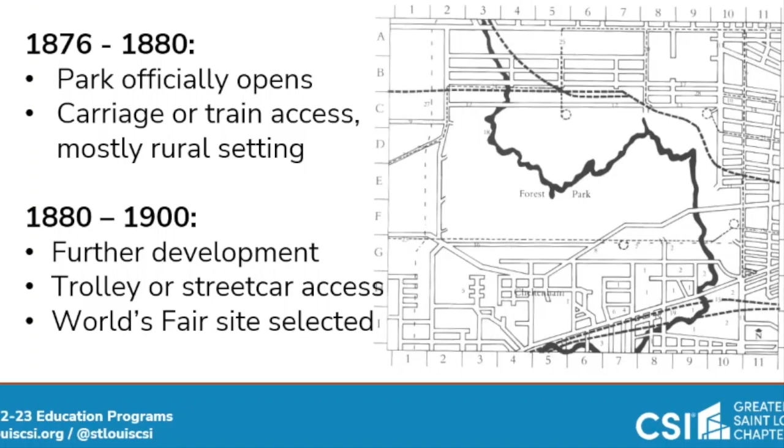More hard surface. It periodically flooded. So as we further developed the park, as we got trolley and streetcar access, as we moved west, it became a more intensely used park.

And then just before 1900, the World's Fair site—we're going to have the World's Fair in 1904—the site was chosen to be in Forest Park.

So, a couple of influences that were going on when you're designing parks back in that era. Frederick Law Olmsted, who designed Central Park, sort of the father of American landscape architecture—this is his sort of image. It's an urban park, but it has a very rural feel to it. It's picturesque, allowing for pathways like this, and also some more open grassland, and so forth.

In the early 1890s, the City Beautiful movement starts to take place. Daniel Burnham, the architect of the Columbian Exposition in Chicago in 1893, is the guiding light to that. The idea is a Beaux-Arts or neoclassical feel to it—much more formal than what you see in the above photograph.

So here's what if we were talking about what we're doing with the park in 1900, here's what we would face: which of those two ideals are we going to choose?

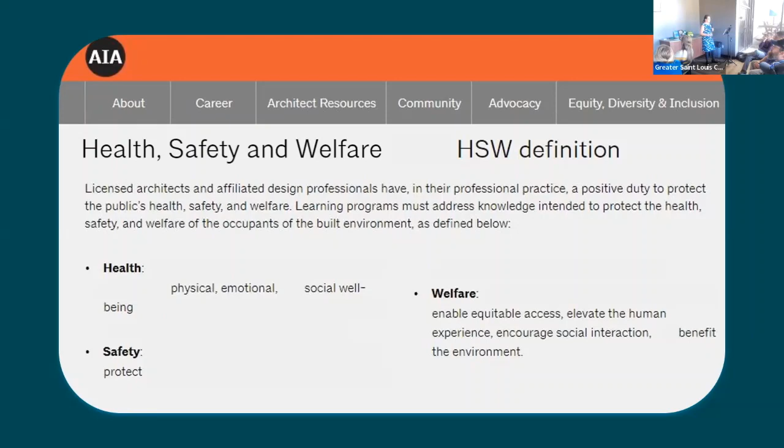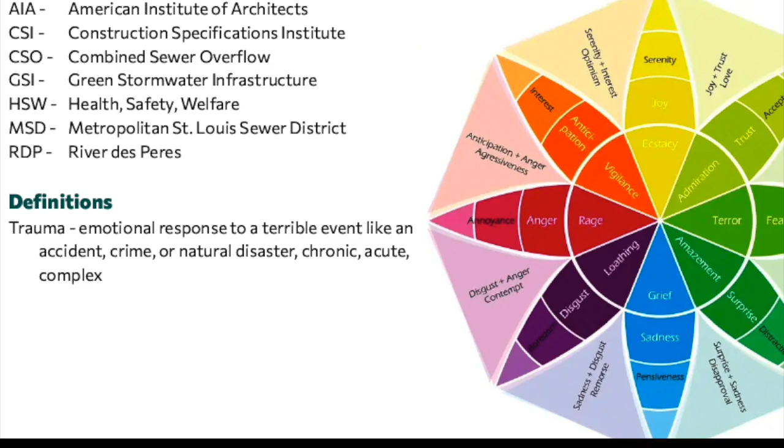I put on our little cheat sheet a definition thing, and the definitions I was trying to put were for things we wouldn't typically have good definitions for. Under the definitions, the only one I got to was trauma, and I think that's really important because...

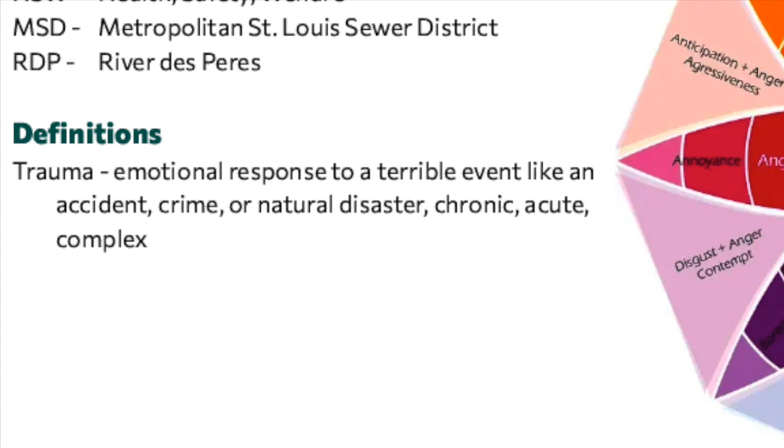We as a people have experienced a collective trauma, and that's the pandemic. I listed chronic, acute, and complex, and you can imagine trauma comes in a lot of various forms, from a car accident where you hurt your neck and you're afraid to go through that one intersection again, to the loss of a job, to a medical issue, to an abusive relationship, to the pandemic.

I think what's really important about listing that as a real thing is that it's something we've all experienced. We all have an exposure to that. In fact, I remember when I got COVID, after the fact, I wished I had put an out of office that said I got COVID. Everyone was super gracious on the tail end, but it would have been even easier on the front end if I'd just said, yay, I finally got the thing that we've all been experiencing.

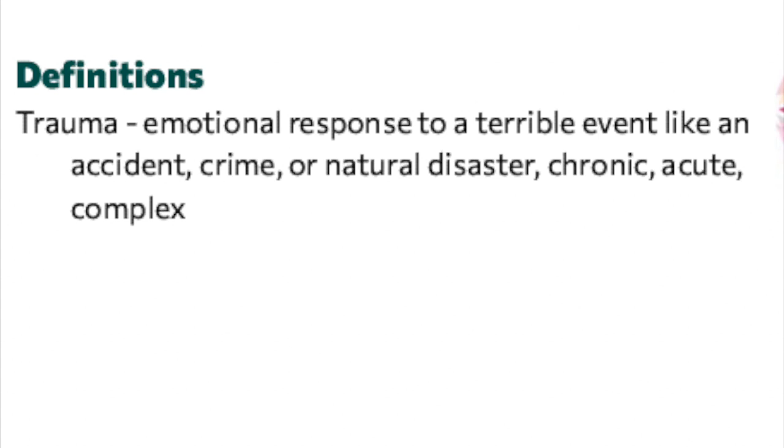I want you to pull up this piece of paper for a second. On the front there's this pretty wheel, a wheel of feelings. You can look at that and learn some words. There's discussion questions, and on the back is the fun part, a list of things about me, where when your mind wanders in the next 45 minutes, you can fill this out.

And I'm inviting you to make up stories about me. Think about how I got here today, whether I live in a house or apartment, what my hopes and dreams are, how many jobs I've had. You're just gonna make it all up. And if you know me personally, you can fill in whatever you'd like. Oh, I already started that — that's me. Let's get back to it.

There are other categories on there based on discrimination, and what I want you to think about is that you're going to make up all these stories about me, and some of them will be true and some won't. So as you look at this sheet, make up stories about me, but don't tell me — I don't want to know. As you work through this, think about which ones are factual and which are not, and just take note of that. That's all.

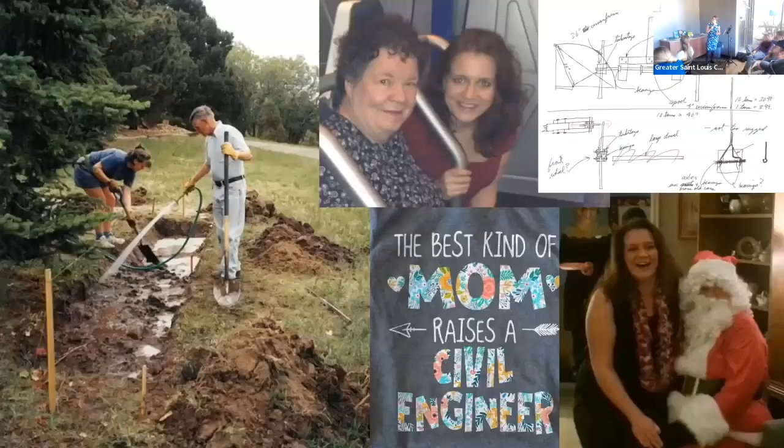This is another little bit more about me that I think is sweet because I know my parents are watching, and I'm just going to quickly go through these. On the left is my dad and I building a leach field in Colorado Springs. I found this picture probably four years ago, and I'm guessing I was 13 or so at the time. I just think it's so brilliant that 13-year-old me wanted to be an astronaut. I definitely didn't think I'd be a civil engineer. So how fun that at 13 years old, I was creating the wastewater field in our own house.

And then the pictures of my mom I think are really special, because my mom taught me to make everything a fun game, and that if you're bored, that's your own fault. The bottom right is where my mom dressed up as Santa Claus at my college graduation party when I was 28 years old, and it was a long time coming. So she added a whole lot of pizzazz. I was just a December graduate, and she had lots of people at my party sit on her Santa's lap.

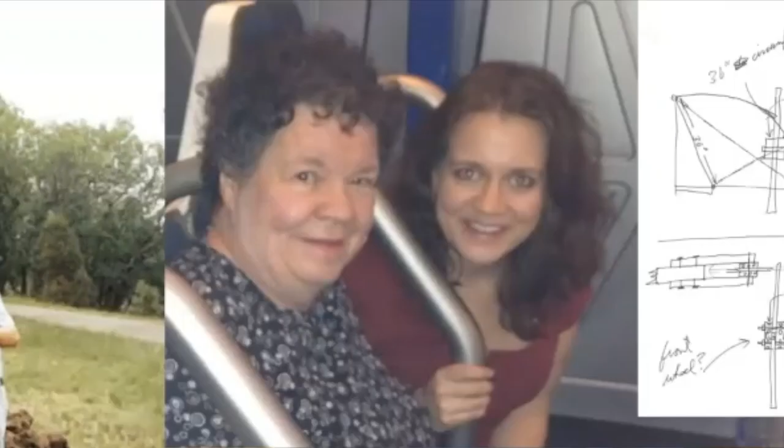And in the middle one at the top is my mom and I riding a ride at the Kennedy Space Center that I suspect was pretty scary, because she's got a little apprehension on her face. However, she's willing to try new things and knows that I'm willing to try new things. I think she trusts me to help her try the fun new things together.

So the note I left was that my mom taught me that hair grows back. That's so funny for those of you that worked at MSD, where I shaved my head a month after I started.

My mom is an amazing project manager and chef, and I think she could have been a civil engineer. My dad is an electrical engineer, and he taught me that every problem has a solution, and that I can do anything. Every problem does have a solution with enough resources, enough time, enough money, enough everything. Our only limitations to our problem solving are those resources. That's a sweet mousetrap car my dad clearly designed, but I do remember building most of it.

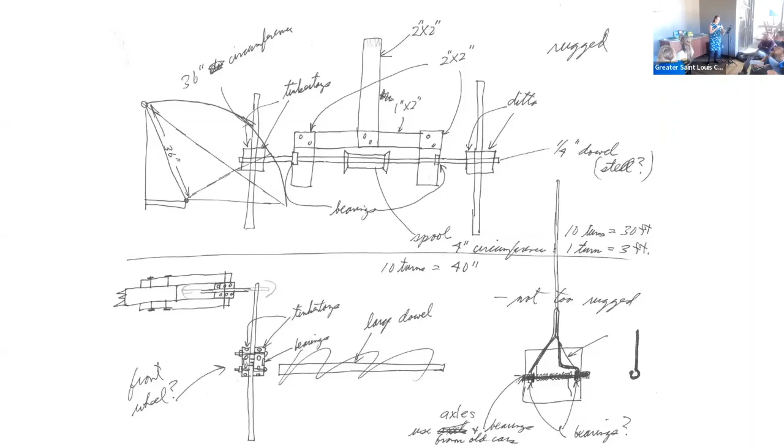People have a harder time relating to someone who doesn't look like them. And I reframed that positively to: people have an easier time relating to someone who does look like them.

I intend to make a whole lot of analogies today between the River des Peres and our human bodies, between how we design things and work in community, how we can treat people in our places of employment, but also our families better. So when you're wondering how does this relate to me, or my communities, or how are we the same?

There's something I've been reading a lot lately called an empathy gap, which is that we have an extra hard time putting ourselves in someone else's shoes when we're having a hard time ourselves. This keeps coming up lately as work's picking up, because the number of people bombarding me with minor minutia, not recognizing that I'm right at the end of my rope, really overwhelmed, is pretty startling. But people know me as a happy-go-lucky person who has time for everybody. As I'm trying to tighten those reins, I'm really recognizing that you're used to me dropping everything to help you, and now that's changing. It's been an adjustment in a lot of my relationships.

So as we're framing things positively, I also want to note that some of the ways I'm trying to get better at being kind to myself is reframing my own stuff positively: instead of saying I'm lazy, I'm efficient. I'm not a procrastinator, I thrive well under pressure. I didn't bike here at the last minute, I got here right on time. I'm not sensitive, I'm observant.

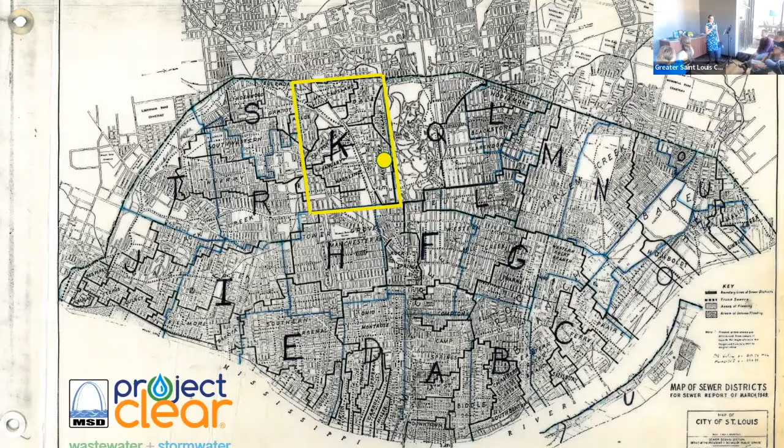Okay, so again, yellow dots roughly where we are. What do you all see that's special about this map? What do the blue lines indicate? Is that Deer Creek that goes into the River des Peres? Why is there a dead spot around Forest Park and all those blue lines?

Doesn't the River des Peres open up somewhere to the north of the park? Or is that one line that I'm looking at? Well, where the three lines to the north are ending, that's where it turns to piped, and then just to our south is when it opens back up, where it daylights.

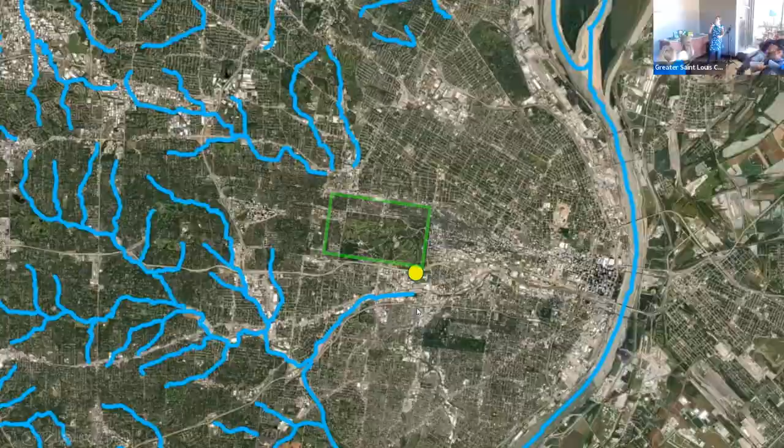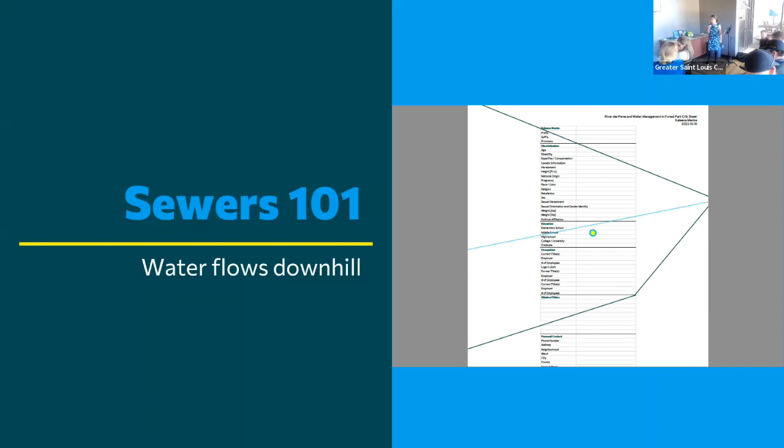So the other note is that if you fold the solid lines like a mountain fold and the blue line like a valley on your origami, you'll get another hint of where that is. Yeah, that's good.

Pointing to the reclamation facility? Nope, bigger scale. Good. Oh, folks at home, I forgot to tell you where this presentation is, or the cheat sheet. If you go to my website, which is my last name, Menke.llc, there's a PDF right at the top that you can find and look at this for yourself.

Do you see it now? So this, ideally I wanted a whole outline of the United States on the back there, but it wasn't there. So the blue line down the middle of that backside roughly represents the Mississippi River, and the two black lines on either side roughly represent the mountain ranges of the Rockies and Appalachian Mountains. So that is to help us learn what a watershed is.

Something else my mom is super good at is event planning or party planning. And what I think is fun to relate to this is that, as part of being a stormwater engineer, what you have to do is imagine you're a water drop and you fall from the sky, and where does that little water drop, what little journey does it go on, and where does it go before it ends up at the Lee wastewater treatment plant, or the Mississippi River, or Louisiana and the Gulf Coast, or either ocean? How does that water drop get there?

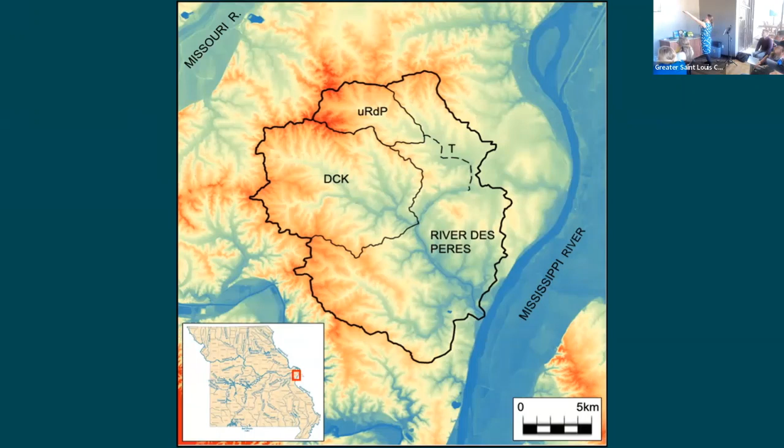Okay, so here we're zooming in a little bit more to show the same watersheds, where we've got the River des Peres watershed, and then DCK, Deer Creek. URDP, that's Upper River des Peres. I didn't put the little dot on this one, but we are roughly where the little dotted line and the black line are next to each other.

Okay, tell me what the flow rate is for a pipe. What's the equation? Yeah, area times velocity. Q, which is flow, equals velocity times area.

So in these two instances, we have a pipe on our left, where the area is represented by the yellow, and then the area is yellow on both sides. So one is an enclosed channel and one is intended to be an open channel. I shouldn't put the blue line on top, but can't get everything right. The other thing I want to show here is that if that area is similar, if the yellow is roughly similar in these two, then the flow is based on other materials like the slickness of the pipe or the material of that channel that we have.

So in the River des Peres, we hit all the options. We hit pipes, we hit open channels. There's parts that are kind of naturalized upstream of the River des Peres, what we know and love as the River des Peres.

And how that relates to how we design infrastructure in the future is that the biggest take home is the one on the left, the circle. When you're out of space, there's no more space for the yellow to go.

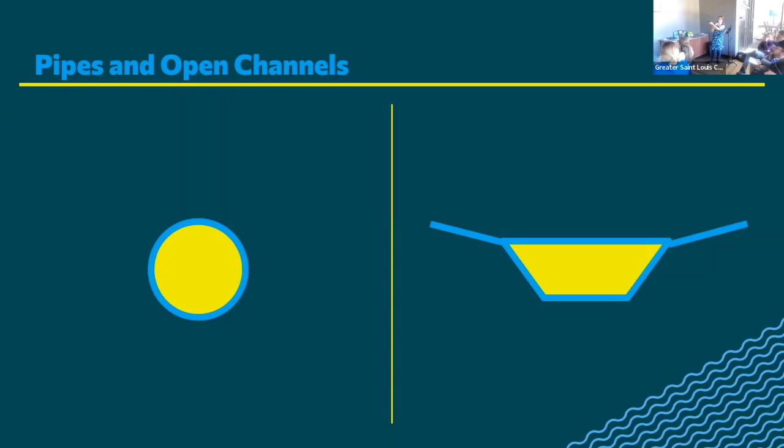It comes out through our streets and through our sewers, and it floods our basements, and that's all we got. Versus on the right, when the yellow exceeds that bowl, then it overtops it and comes out on the side banks. And we just got to go back to the pea funnel for one minute.

So the previous versions of pea funnels, up until about two years ago, all seal against you, so you have to hold your pea so you don't let it out too fast. Whereas this one, you can let it out as fast as you want, and it just overtops the side of the channel. It's pretty neat.

Okay, then we're going to do a quick one on sewer overflows, aka why St. Louis smells so bad in the summer. So this is, I imagine, pretty well established for most of you in this room, so I'm again going to go over it quickly.

When rainwater falls from the sky, we collect that in one pipe system, and our bathrooms and our laundry and our showers go in another pipe system. At first we used to throw those all in together, as George mentioned, and then we just throw it in the Mississippi River. So our method for managing wastewater used to be: get it away, and get it away fast.

We're starting to recognize that that has a lot of problems with it. So this shows a combined sewer system where the rainwater and the wastewater, the shit water, are both going in the same pipes. When that happens, for the most part our systems can handle that, lots of the time. When it can't handle it, it can't handle it in a really big way, and that's getting worse with every passing year.

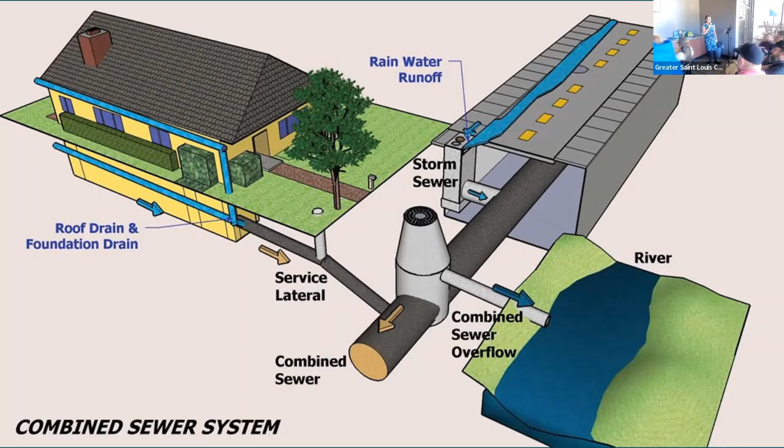So this is kind of an angled view, and I've got a couple more that are just a plan view and then a section view. Clearly this was created by someone else, and I don't know what those words mean, but my best guess is that the orange or red is your wastewater and the blue is the stormwater.

So previously, on the left, you can see the solution was to put them all in one pipe, one big pipe. Now we're realizing, oh gosh, we should probably separate those two, because when it rains a lot... This also shows well the relative size of stormwater pipes versus shitwater pipes, which is that stormwater pipes need to be a lot bigger, because when it rains, a lot more comes through than it takes to flush the toilet.

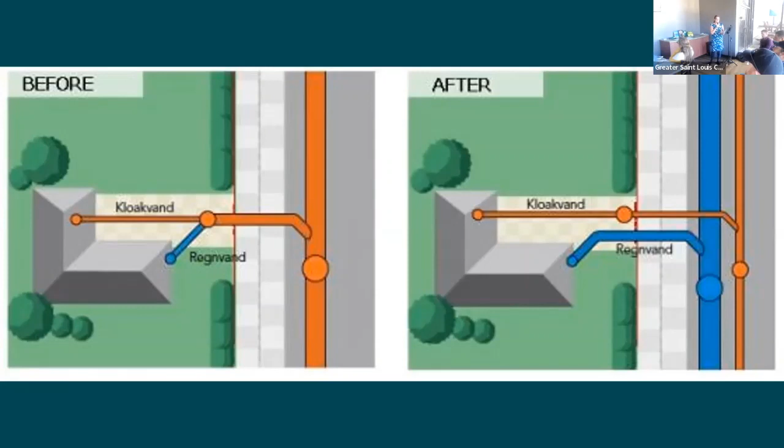Okay, and then here's where we're going to show those interceptors, or those dams. So on the left is the combined sewer, which again means our stormwater and our wastewater goes through the same pipe, versus separate sewers, where they go into two separate pipes.

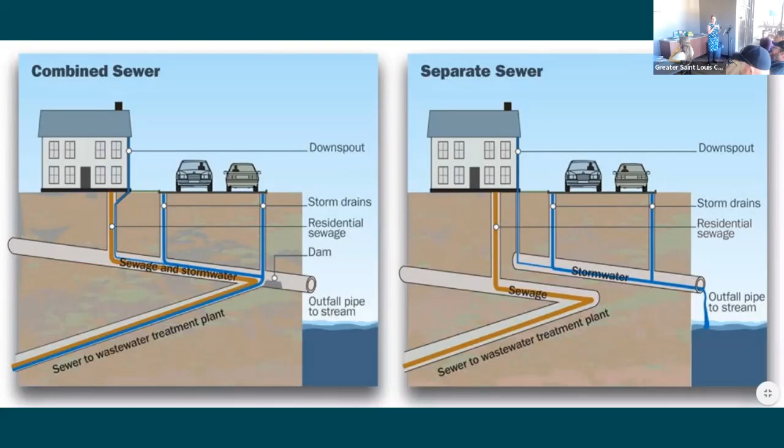And in the city of St. Louis, that's all we've got — we've got combined sewers throughout. So when I flush the toilet, and when it rains, all of that water goes to the same place where I live. On the left, they show a dam here, and that's another name for an interceptor. So a dam, or a diversion wall, or a gate, is just a way to say: okay, shitty water, we want you for the most part to go this way, unless it rains a lot, and then we're all screwed. And then it goes straight to the Mississippi, and that's all right too, because it's the best we got.

I started talking about this a little bit while I was at MSD, and it's really important to me because of the pieces of our history that I don't think we fully recognize — the impact on everything, and how that relates to how we treat people that look different from us really matters.

So MSD is an organization that existed, or consolidated a bunch of sewer districts, in 1954, and basically got the privilege of gaining a whole lot of collective problems that nobody alive firsthand contributed towards creating — or lots of people alive. You're either aware that it's an issue... for instance, I'm not even from here, I didn't do a lick to create these issues.

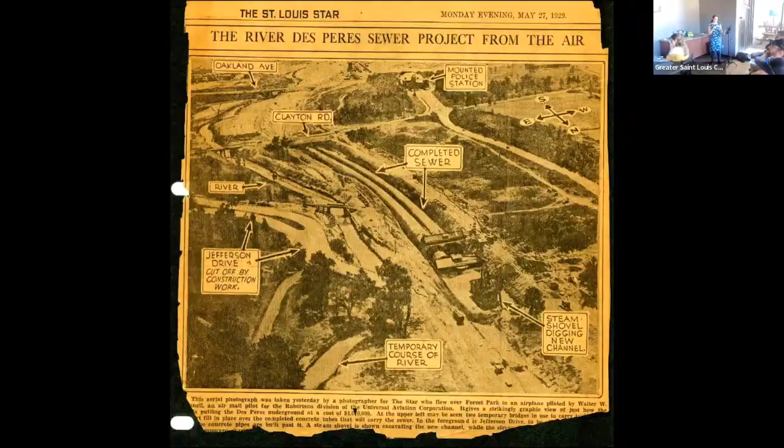It's a crane. Here is the map of the total spot through Forest Park. In the middle, you can see they show the typical section for the different parts of the channel. Through Forest Park, it's completely buried. If you can picture that river picture where we had the blue lines that then stopped for a bit - once we exit Forest Park, about a mile diagonally that way is where the channel opens back up, and you can see this V-shaped trapezoid where the pipes open up to an open channel. You can also see there's a little tiny blip of a loop underneath.

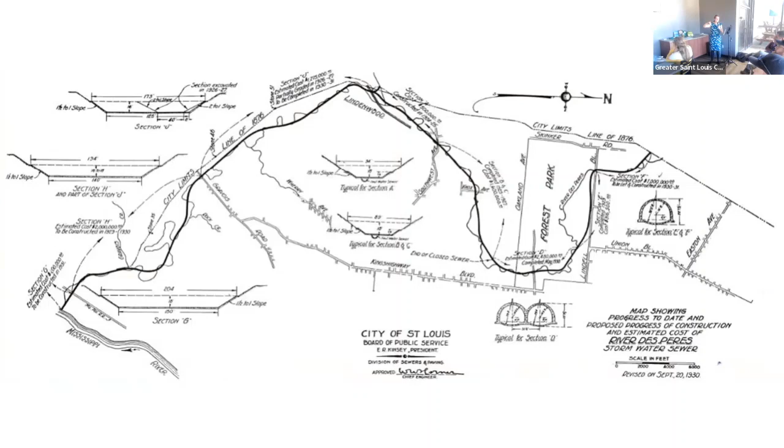So the construction of the River Des Peres, the twin tubes and the open channel, took place from 1924 to 1933.

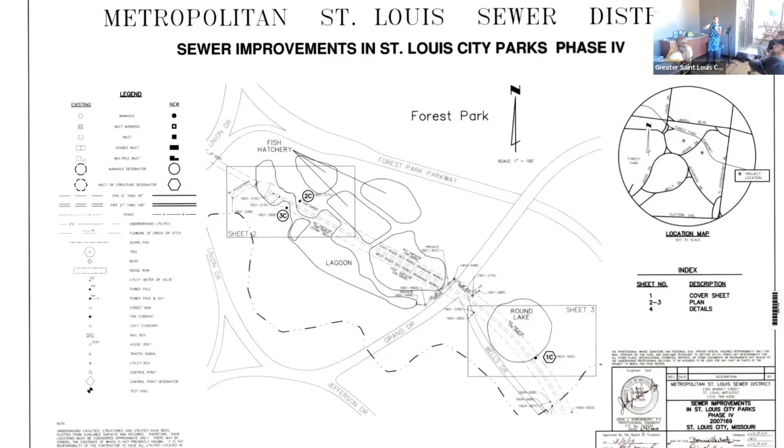Now we're hitting the imaginary, or 'imagine our future' portion of this. Forest Park is close to home for me. I just live a mile and a half that way. I spend a lot of time recreating in the park. I think it really is the natural gem of our city.

What's really exciting is now that we're starting to realize that our systems all work better when we work better together. This was one of the favorite projects I worked on while I was at MSD, because we took these freshwater sources and combined these lakes into an interconnected system, and it's currently under construction right now.

So this is a spreadsheet that Gary, formerly of MSD, made, which shows the rainfall totals from 1870 to 2018. I throw this in there because it's very data-based and not pretty, and it covers over 100 years. But what it does show is a very clear trend line for our rainfall events, which is climate change.

Our rain in this area is getting more intense and more frequent. You can all remember your water classes in third grade, the water cycle, which is that we have a constant amount of water in the globe, and yet it's hitting some areas more impactfully than others, and also hitting them more frequently than others. So that's the volume and then how often. You can see the spikes have gotten bigger here in the last 20 years, and this only stops in 2018 - we're blowing this chart out of the water even today. The pink line is just highlighting the trend line of the moving average. I highlighted one of these down here just to show it is going up.

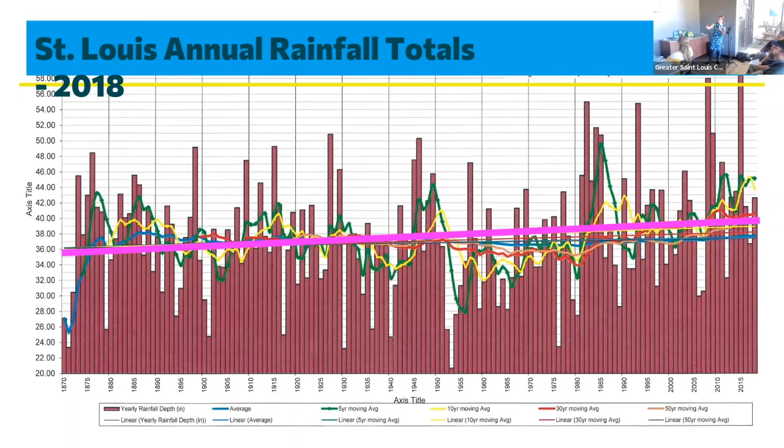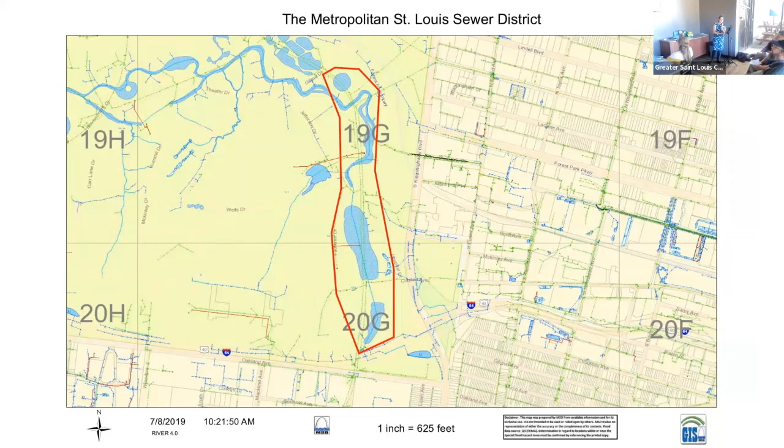This is a quick funny to show why you should always steal other people's work that have done it better. This is an exhibit I made at MSD to present to my board on why I thought this project is located here. And then I reached out to SWT Design, who made that so much prettier exhibit.

SWT Design is the design lead on this project, and they work with Forest Park Forever, an organization whose goal is to make Forest Park our crown jewel today, tomorrow, and in the future. They have such a great community aspect to everything they do. They recognize that this stuff matters, and that if we're spending hundreds of millions of dollars on this to do it again, we need to be doing the best we possibly can given the information we have right now.

So the other thing worth noting about this Forest Park Waterways project is this is just the eastern portion. Before I showed you that we had done a little bit over there, the part on the west is already done, and it's a much more interconnected system. And now we're getting the tail end of how to do this.

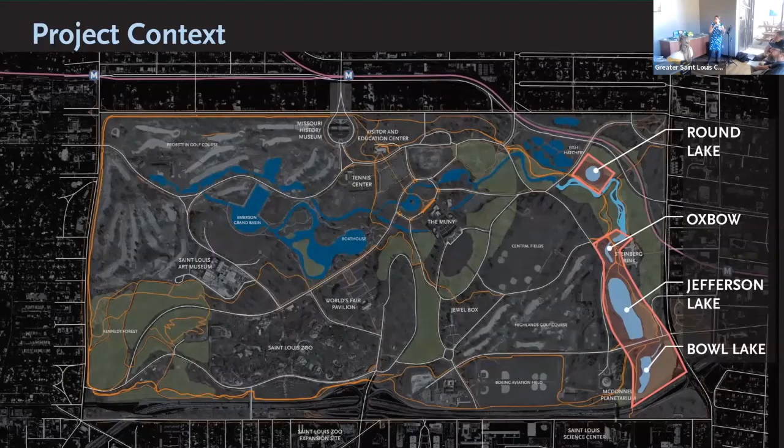So today, all of these lakes were separate lakes with a water source from the City of St. Louis Water Division coming out on one end, and then on the other end there'd be an outlet structure that overflows straight to our sewers. So we're unnecessarily treating millions of gallons of clean water every day just because of how these lakes are set up. This is just a list of why this project's awesome.

But the really big takeaway I think is important: as engineers and designers, we get stuck on the technical aspects and why this matters, and we miss the larger picture, which is that we need wildlife in our cities so our cities can thrive. We need clean air in our cities so we can thrive. And it's all for us. The water will go where the water is going to go with or without our involvement. But if we don't want it to flood our houses and we don't want it to get us sick, then we have to help guide it, and we have to do that thoughtfully.

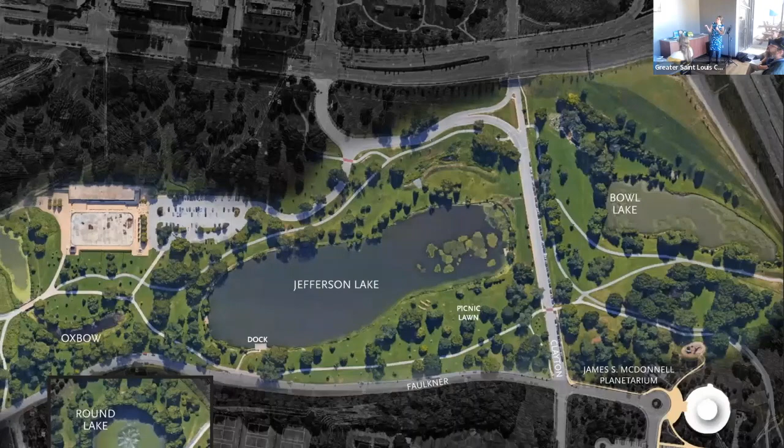So that's what it looks like today. Again, we're just off this map right over here on the right. Remember before we talked about wet weather and dry weather systems. So when it rains, we need extra capacity throughout our system. We need extra big bowls. And this is a way that we allow our little bowl of Jefferson Lake to become a bigger bowl on purpose when it rains a lot.

So right now, when it rains and Jefferson Lake floods, it floods Steinberg skating rink, it floods this Oxbow on the left, it floods this entire region, and it's not pretty. So now what they're doing is they dug out some of the lake and made it deeper in some spots, and then they have natural areas to the north that are going to be a little bit of a wetland area, and what that all does is it allows some resiliency to be built into our systems.

Along with that, the structures we added are elevated so that that whole lake can fill up several inches, which is a lot of water for that big of a lake. And then it can drain down slowly over time, which means less water is going to combined overflows to put dirty water in the Mississippi River. And they did the same on Bowl Lake too.

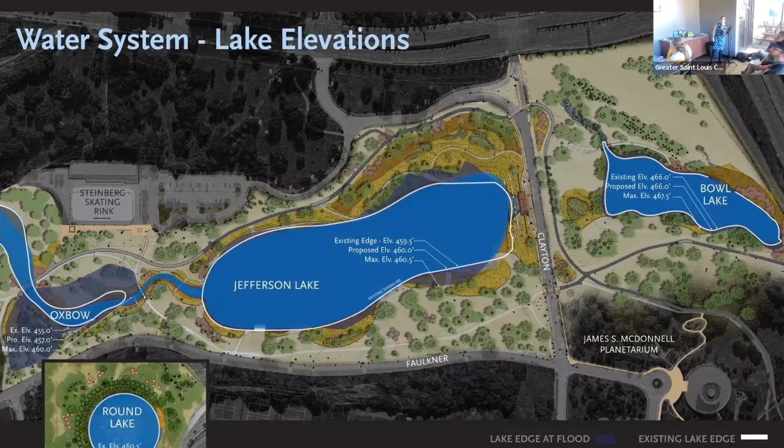So they created these systems. Here it says existing elevation 466, max elevation 467.5. So that lake can get a foot and a half deeper when it rains. This one over here can get a foot deeper when it rains on Jefferson Lake. That's a lot of storage and a lot of water that's not going to combined sewer overflows.

And then when it's dry weather, what's so darn cool about this is instead of 3 separate freshwater sources, we're down to one constant one, which is the 7 pools at Bowl Lake, and then 2 smaller ones at Jefferson Lake and Round Lake, and those are only as needed.

And then all of these lakes are interconnected, so fish can go throughout, plants can go throughout, wildlife can go throughout, and these lakes that were independent will now operate as one system together.

And here's my slide on bringing it back to specifications. One of the challenges of this project was the River des Peres—oh, you can't see it well, there's a tiny dashed line right in the middle. If you're watching online, in the center of the Jefferson Lake there's a very faint gray dotted line.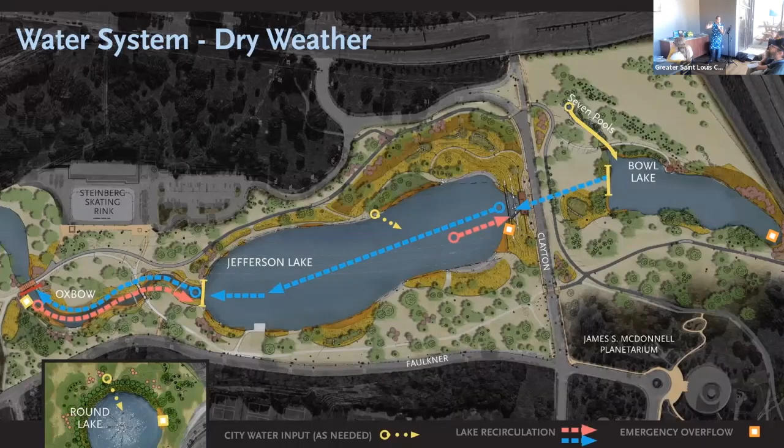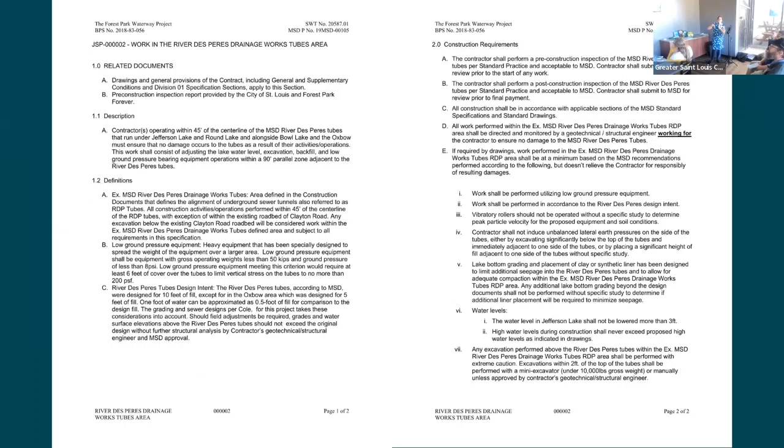So that's how we determine what heavy equipment can go where, and how we can again protect our sewers below.

I don't know the total cost of this project, but I do know that MSD is contributing $1.2 million, coming out of the budget for green stormwater infrastructure.

Green stormwater infrastructure is a way to manage water closer to where it falls. As part of this project, they are installing rain gardens, and this whole project ultimately reduces combined sewer flows to the channel.

The final thing—a lot of people have been asking for a long time when the River des Peres will be restored to a naturalized channel. I'm thinking, especially south of us where it's a concrete channel that's being overflowed—Forest Park is a harder problem—but there's a lot of room for improvement there.

This was a game I played at my going away party from MSD, and I just think it's a really good one right now too.

I've been betting not in my lifetime. I think it might be the next civil engineering project, the next big one. We're a long ways off.

But what's fun is I keep having senior design students at SLU and WashU looking at this going, why aren't we doing it now? We could do it now.

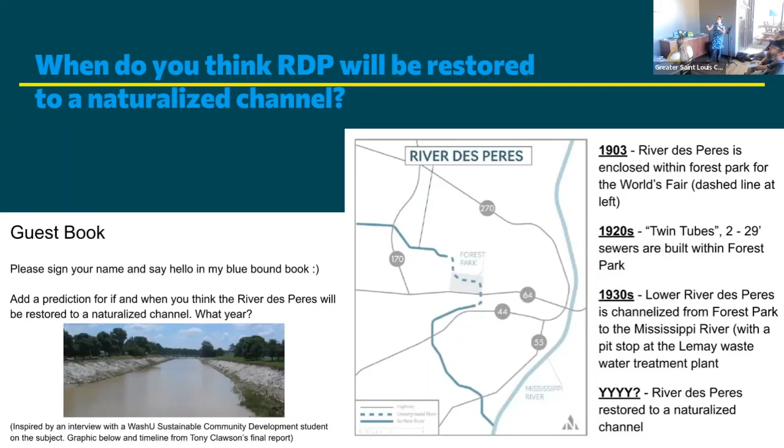Here's the answers to some of the questions that I put in there.